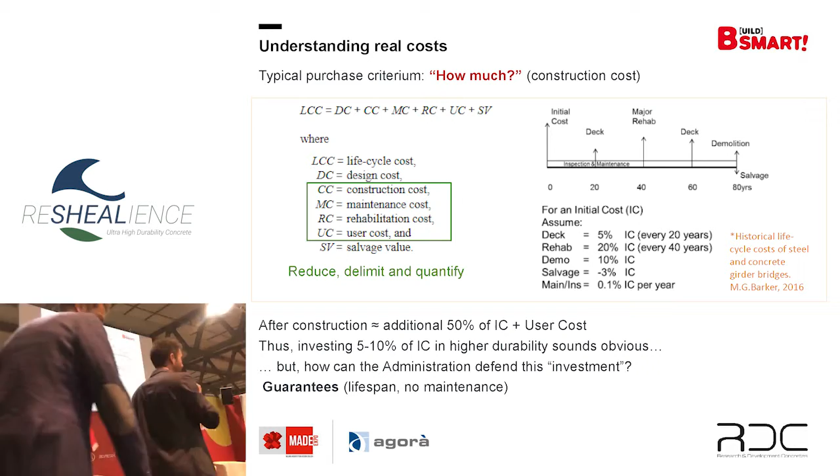The cost associated to rehabilitating a structure also implies how we are affecting citizens when they need to go from point A to point B. This is like the cost I assume when I need to repair my car and I need to take the bus or a taxi to go to my job. This is the user cost. We don't think so much about it, but it's important.

In the end, we could say that the total cost, the life cycle cost of an infrastructure, is 50% higher, more or less, than the construction costs. This means it would be very intelligent to invest 5 or 10% more in the construction of infrastructure to reduce this 50% to a 20 or 25%. But it's very difficult to convince someone that your approach will be more durable in the future. At least at this moment, we know it's very complicated.

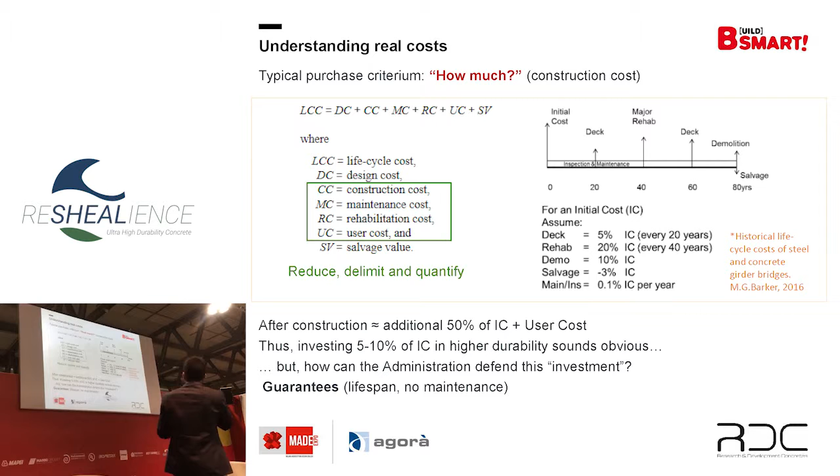Because this is what we are trying to sell in the market, and it's being difficult. If you think about a new car brand in the market like Dacia, for example, we can try to sell a Dacia for 30,000 euros.

Explaining that our car will be more trustable. But people will say, I will buy a German one. Why? Because Germans built this trust in durability, and Dacia didn't. It is exactly what is happening to us. We know we have a very good product, but we need to build this trust.

The first is monitoring our advanced concrete structures, but also monitoring concrete structures that are already there, or normal concrete samples there, to show that our structures are better.

This is an example of live monitoring. We are receiving data every day of our floating platforms, how advanced concrete is not suffering any kind of corrosion, and how corrosion of ordinary concrete that is in the same location is already advancing.

So we are measuring the section of the bar in normal concrete elements, and the advanced concretes are not suffering this. This is good information for us because at this moment we have results in laboratory, but not in the real structure. It's useful for us, but it's also useful for the customer.

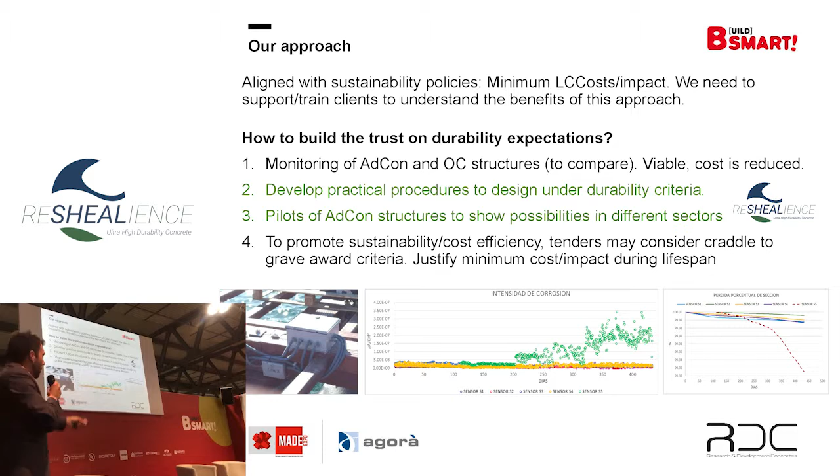And the fourth, very important point: we need to convince administrations that the most interesting approach in medium and long term is to promote tenders where the whole life cycle costs are considered. Now there are public tenders where only the minimum construction cost is counted. We need to integrate the whole costs, including maintenance. So we need to boost, to promote that administrations do this.

Here I am showing one of the two examples. This is Valencia in the south, and this is the motorway V-21 that goes to the north. There are three footbridges that, if you drive by car from here to the north, you find: first an ordinary concrete footbridge, second a steel truss footbridge made in 2013, and third a UHPFRC structure which we designed and built one year later.

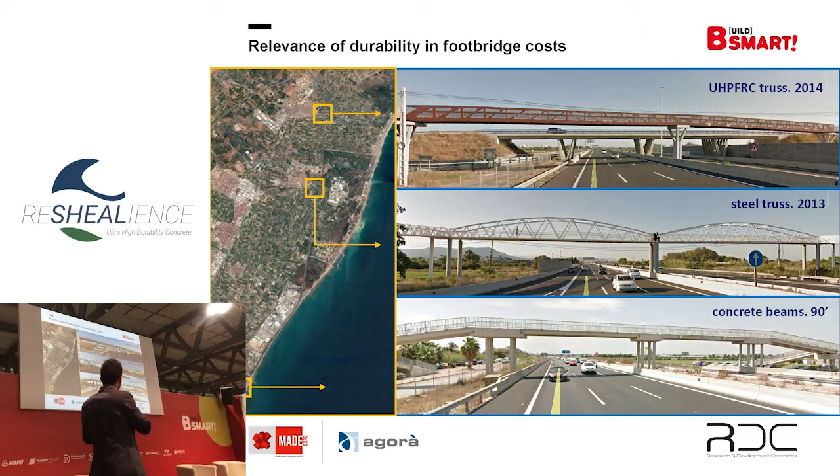We can discuss which is more or less nice, but in the end what I mind are the costs. When El Puig decided to do this steel truss in 2013, they were not thinking about durability, just about logic, having access to the sea. These are all structures for people from the villages to go to the sea. So in this time, from 2013, they needed to paint this structure two times, or I think three times.

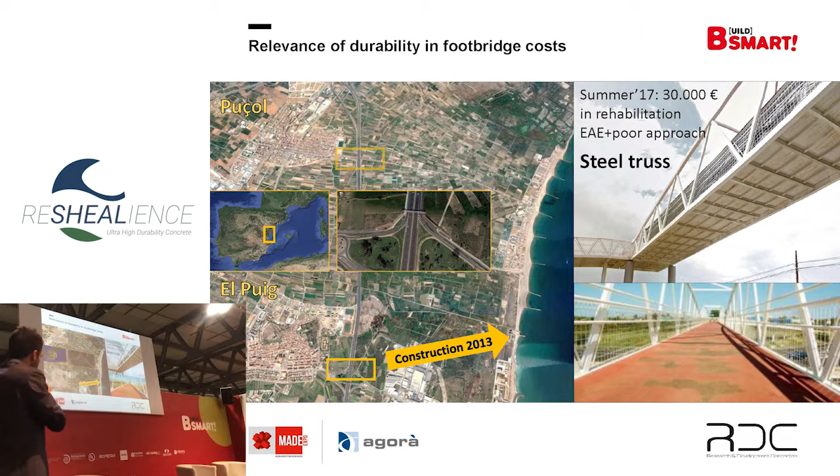This is not a very high cost, but it's a cost. And last year they needed to repair it. They spent 30,000 euros, which is already approximately 15 or 20% of the structural costs. Only in six years.

Our footbridge, the one we made in 2014, is there. It's working, working for the same function: people going from point A to point B. We are inspecting this footbridge. It doesn't have any kind of failure. We didn't need to paint it because this is the color of the concrete, of our concrete.

The maximum crack opening is more or less exactly what we expected: 0.1 millimeter, which is under the norms, but it also self-healed automatically. It closed itself. I cannot tell exactly which components, because the concrete is more intelligent than me, but it closed itself. So it didn't need any kind of maintenance, and we expect this to continue.

It has another advantage because this is glass, and people cross the motorway not being afraid, not being uncomfortable, because they don't feel the sound of the trucks like they would with steel.

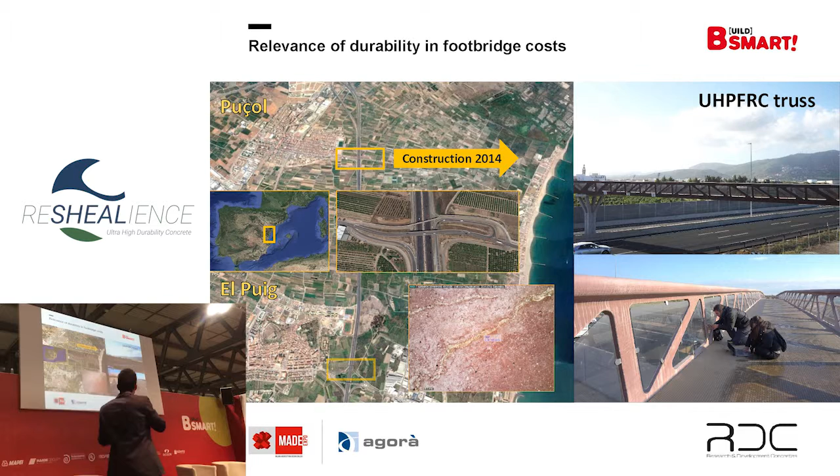So in the end, if we speak about cost — what did I want to say? El Puig was not thinking about durability, but now, seeing how much they need to spend every year, these little costs, they are thinking about durability. Durability can be compared with a battery: you only think about it, you're only aware of it, when it's ending, when it's missing. You see your mobile phone and think, I should have used the low battery mode. So now they are aware of that.

In the beginning, our structure was maybe 20% higher in cost per square meter compared to the initial cost of the El Puig footbridge. But with the coatings and the repairs, at this moment, after six years, the cost is the same. I can assure you that in ten years our structure will for sure be the cheapest.

What is the problem? That administrations are thinking in four or eight years. They don't think they are going to suffer the consequences of durability, but they already do. Especially not in costs, because for them maybe 30,000 euros is not so much. But the problem is that they need to close this El Puig footbridge, which brings access to the beach in summer, and the citizens were very happy with this metallic footbridge.

But after two months, they don't let you close the footbridge. They want to go to the beach using their footbridge. Is it their right? So they will really punish you in the elections if you close it. So these user costs are important. How much does it cost that this woman can't go to the beach this day? I don't know how much it costs. It's happiness, but this is a user cost, and we need to think about that.

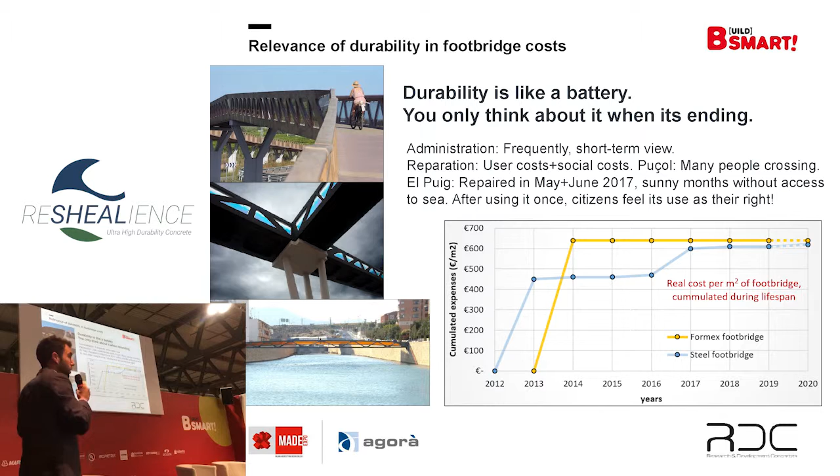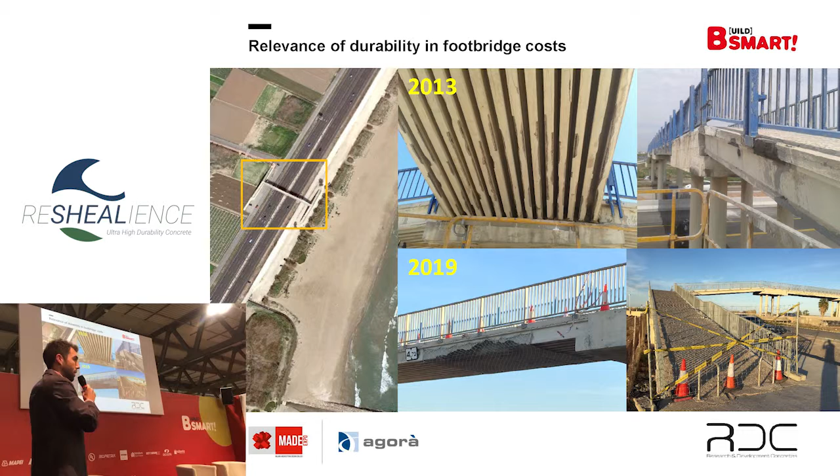I include in the comparison the concrete structure, the third one, because it's a little bit unfair. It was made with another norm. It's also much closer to the beach, but I can tell you that in 2013 it was repaired, and in 2019, last week, they started to repair it again. So more or less every 6-7 years they need to repair it, and it's dangerous because this rebar, this spalling, can fall down on a car.

So it's problematic. So with the administration, we have 2 problems. The first is to assure them that our advanced material is more durable. And the second is to convince them not to be selfish, because they can say, yeah, it's more durable, but I'm here only 8 years.

So we have 2 problems with them. With these private customers, we have only one problem: convince them that our material is more durable, because if they know it's not durable, they won't purchase our product. This product is the floating platforms. It's a patent we launched 3 or 4 years ago, a solution that substitutes the wooden platforms. Wooden platforms have a durability of 10, 15 years. This is to harvest shellfish, mussels, and oysters.

We also bring to the market this solution that we expect—we always think 50 years, it can be much more. It's made of UHPC, we have different models, and the cost is 40% higher than the wooden one. So in the beginning, people said, I'm not going to spend 40% more on a product that you tell me is more durable.

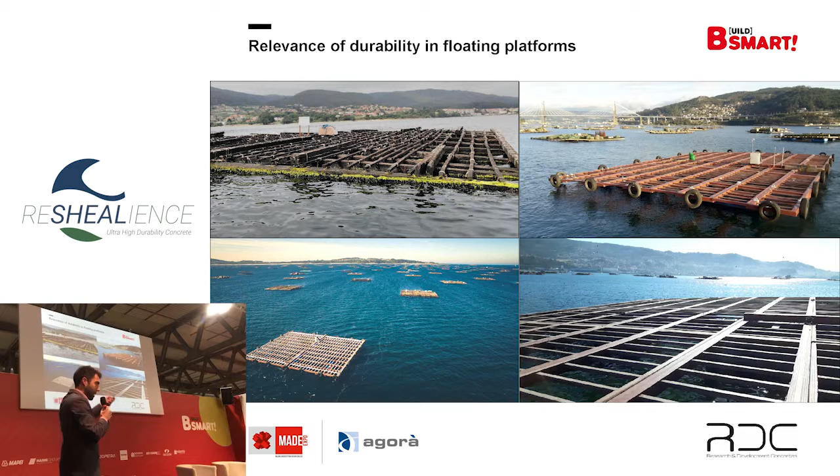So what did we need to do? To invest in assuring this durability. So we installed a camera to show how, under a big storm, our structure is working better than the others. This is the consequence of a strong storm in the wooden platforms—70,000, a lot of money. And so these are some images and figures from our camera.

We also installed on the structures this monitoring to understand and explain that it's more durable than the others. And the consequence is that these customers are 60, 70 years old. They are very traditional, they are farmers. And you know how these people are, they are thinking about the future. They are thinking, I will spend more money, but tomorrow, the day after tomorrow. So they are starting to be convinced, and they are really trusting our products.

So we are now penetrating this market. Now that we've demonstrated this durability, the product is penetrating, and we are selling these platforms to them, even though the initial cost is a little bit higher, but in the end of the lifetime, it's cheap. It doesn't require money.

Finally, the wooden structure really has a lot of social costs, because the maintenance of the wooden structure is risky. You need to take the boat, you need to go there. If it's stormy, you need to do it anyways. So we are seeing a lot of social risks, which in the end are also costly.

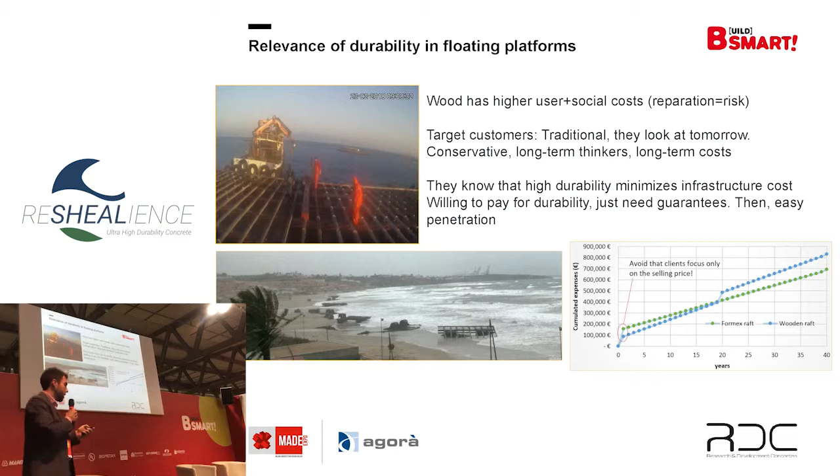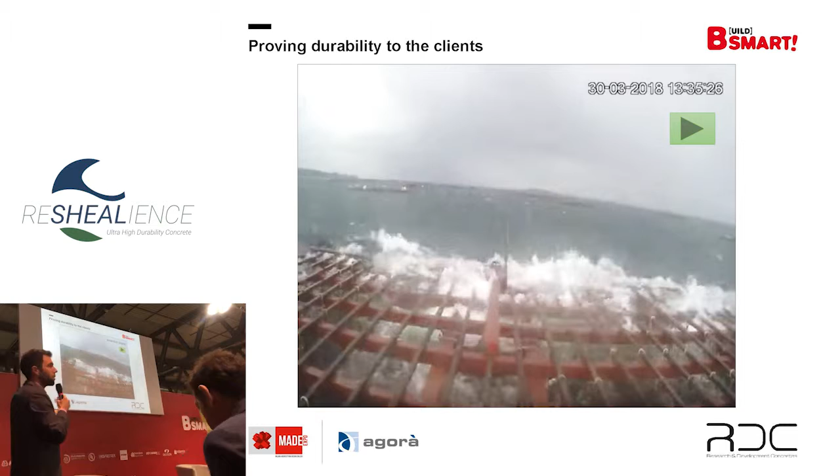You can find on YouTube videos and live streaming retransmissions of how this is working under storms in the worst, most extreme conditions you can imagine, because you have the surface of the sea, the birds landing on it, so it's very easy, and also the abrasion and continuous movement of the waves up to 6 or 7 meters. So on the internet you can find our videos of how this performs.

That's everything I wanted to say.